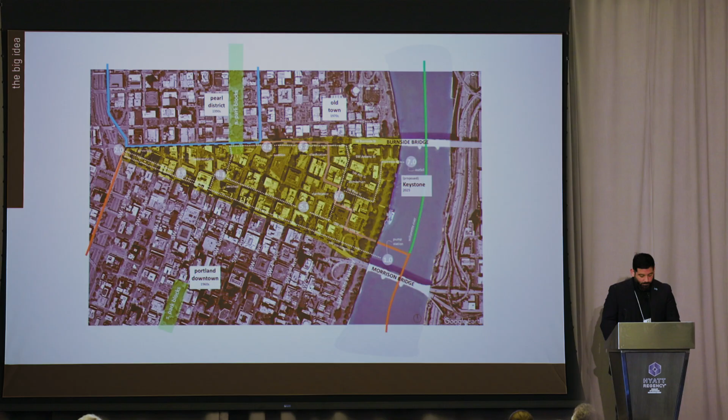For the process, I started by studying the landscape, looking at how our water systems are connected to other parts of the city, like transit networks, pedestrian paths, and gathering spaces. I paid special attention to where water and people already cross paths, moments that could be reimagined not just as infrastructure, but as experiences. I looked for places where water could be reused or collected, and where small changes could create new moments of refuge or beauty in the city.

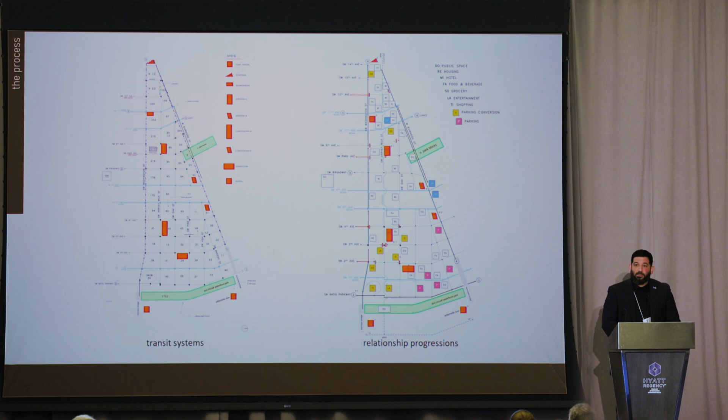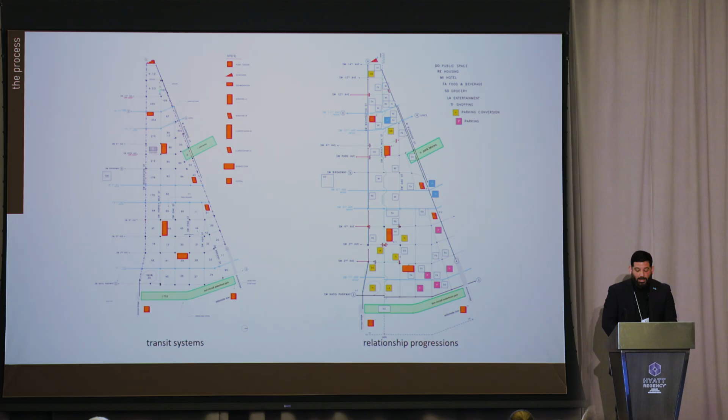This meant thinking about universal infrastructure that often runs beneath our feet, such as pipes, drains, and conduits, not as something fixed and hidden, but as a system of potential to surface and adapt. By bringing parts of the system up into the public realm, we can transform overlooked spaces into meaningful ones. Rather than treating infrastructure as background noise, we can use it as a framework for site-specific placemaking, designing spaces that reflect the character of neighborhoods while also addressing broader ecological needs. These become bridges between communities where shared resources like water become catalysts for connection, creativity, and care.

For the method, what I have on the screen is one of a series of diagrams, as well as 2 additional maps of the district at large. I used both numbers and observations. On one hand, I measured how much water landscapes actually need and how much we can realistically collect from rooftops or buildings - stormwater, not drinking water, not potable water, stormwater to treat our landscapes. On the other hand, I watched how people move through these spaces, how they gather, and where they pause, things that numbers alone can't tell us.

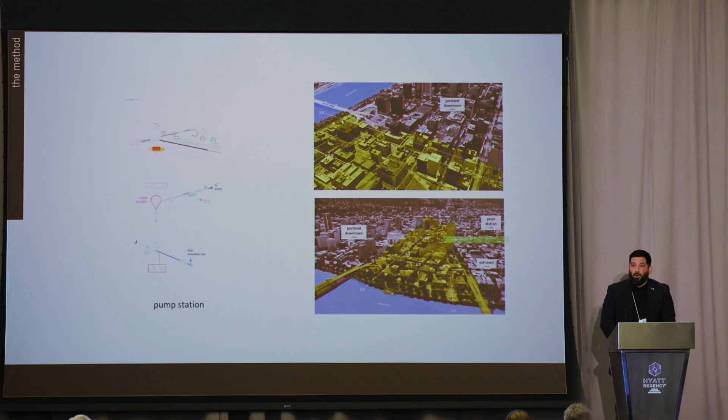From there, ideas combine technical needs with emotional and sensory experiences. The goal wasn't just functionality. It was also about creating connective urban tissue, spaces that don't just exist on their own, but actively link neighborhoods, foster social interaction, and support ecological systems. These designs help stitch the city together, making public space more than just a background. It becomes the framework for community and resilience.

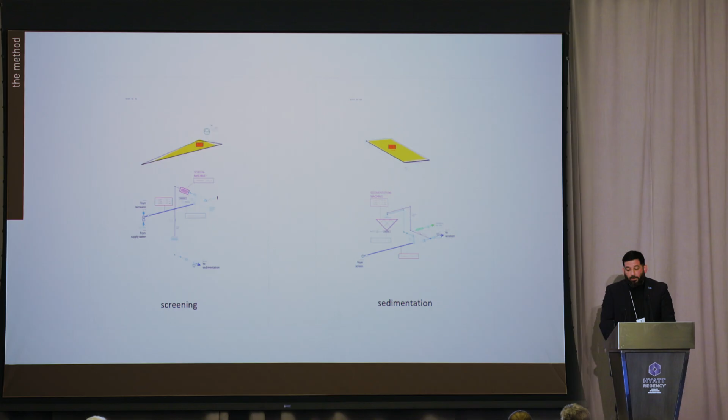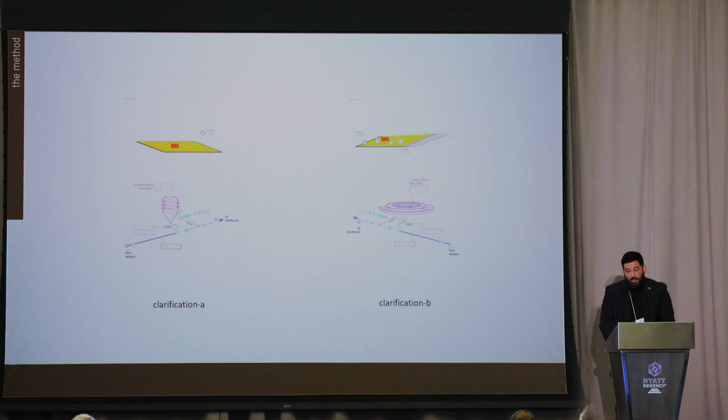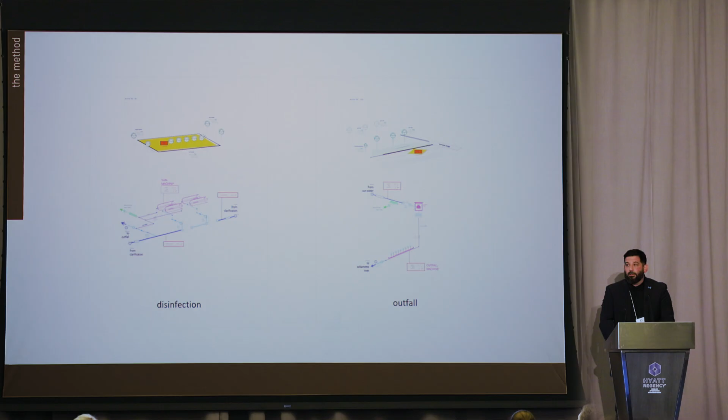For the design approach, one of my inspirations came from objects we interact with every day, things like coats, buttons, and straws. A coat, for instance, protects and adjusts depending on the weather. A button connects, secures, and opens up. A straw moves water from one place to another, similar to what's underneath our feet - pipes and conduits. These simple things inspired architectural ideas, structures that are flexible, useful, and also a little bit playful. They aren't just utilities; they invite curiosity and encourage people to engage with the water instead of ignoring it.

In the same way, water treatment can become part of everyday life, not hidden away, but integrated into the spaces we share. When people see how water moves, gets filtered, and nourishes the environment around them, it changes their relationship with it - it becomes personal. And this shift doesn't just benefit us. Trees, plants, and soil stop being background elements or aesthetic add-ons. They become collaborators in a living system, thriving not from leftover attention, but from a designed reciprocity.

Water infrastructure can nourish urban forests, create shade, reduce heat, and provide habitat, while those same systems slow, clean, and store water for reuse. It's not just about treating water. It's about reshaping the way we live with it together.

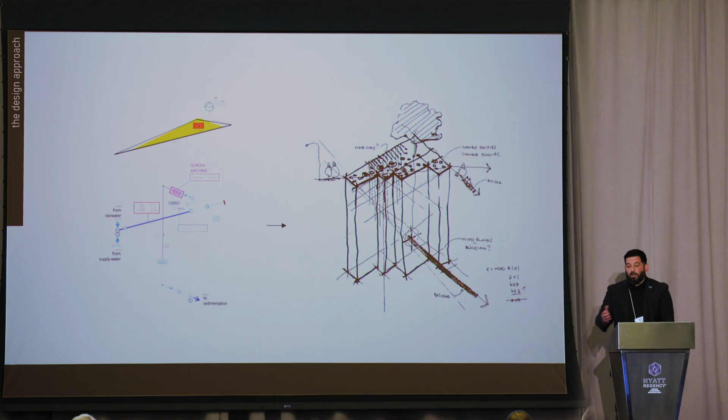What I have on the screen is a diagram of the screening process, one of the first systems any treatment system would encounter. I translated that into an architectural sense in terms of street, edges, boundaries, and landscape, which is what I attempted to show in this pictorial.

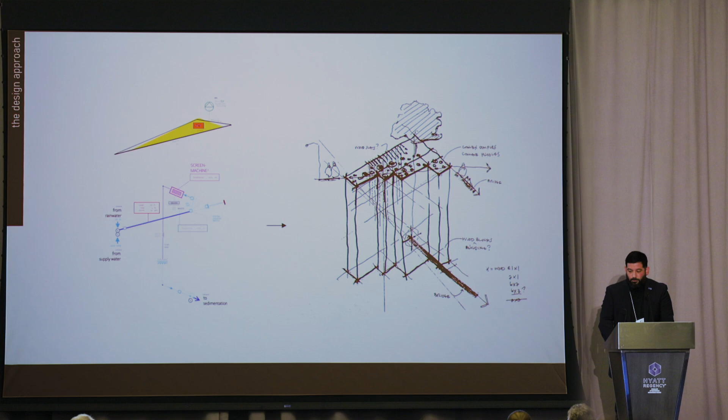Ultimately, this project is about connection between people and place, between systems and communities. When we bring water treatment closer to where we live, we make those systems visible and valuable. We start to understand the effort it takes to clean and manage water, and that understanding builds care. It also strengthens community—people become more aware, more involved, and more empowered to be stewards of their environment when it lives and breathes with them.

Managing water locally reinforces this connection. Instead of sending it away to be treated and forgotten, we reclaim it as part of our everyday landscape. It becomes a shared resource, something we see, touch, and respond to. Local water systems can double as public spaces, educational tools, and habitats, blurring the line between infrastructure and experience—they invite us to participate, not just consume.

The image on the screen is what I'm calling an over-under contactor sidewalk. It's typical in the municipal setting, where you have concrete cells of water containment, and hydraulic pressure moves it from one cell to the next, aerating, collecting, and filtering at each step.

This image is an example of wayfinding within the community, designed to encourage travel from one system to the next. It encourages retention and curiosity to explore the next system—if people don't know where it's at, this example helps guide them.

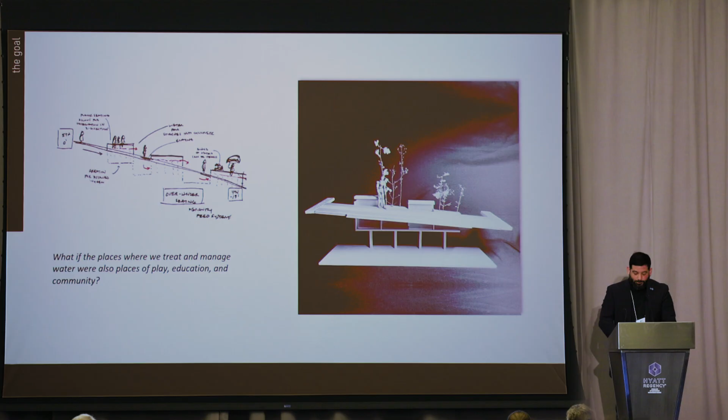Why it matters: we often think of water as a basic service, something that should just work in the background, but this project challenges that idea. It asks us to see water as a resource that can heal, teach, and inspire. By slowing down how we use water and designing systems that respond to the rhythms of our day, we can build spaces that adapt with us and honor water's presence rather than hide it away. We can't control water's behavior entirely, but we can design with it, alongside it, and around it.

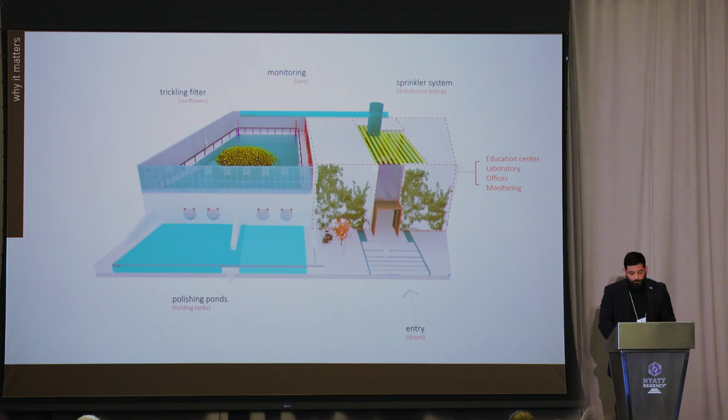In closing, Playful Decontamination is a call to rethink how we build our cities—not by hiding infrastructure, but by bringing it into the open and making it part of our shared experience. It challenges us to imagine public spaces where water treatment becomes visible, interactive, and even joyful, where systems that sustain life also spark curiosity, learning, and connection. This is an invitation to design differently, to create urban spaces that are adaptive, resilient, and deeply human—spaces where water is not just managed, but celebrated.

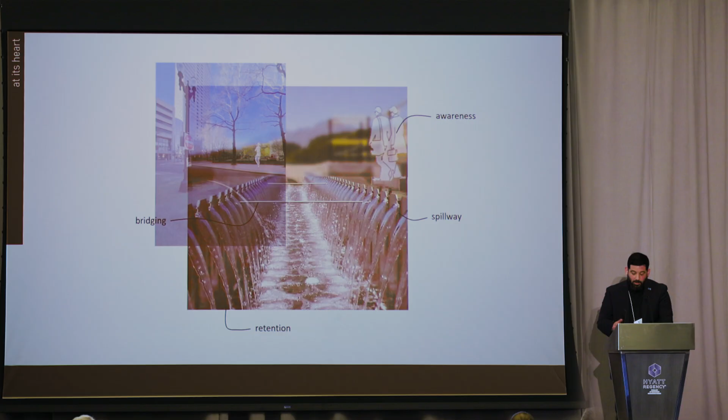So here's the question we all must ask: what if the places that clean our water also helped us connect with nature, with each other, and with the systems that support us? Let's build cities where infrastructure is culture, where care for the environment becomes part of everyday life and play. Thank you.

Thank you so much, Flip. That was really interesting work, showing us how playful engagement between communities and the water treatment process can be central and not hidden away on the outskirts, which typically don't remain on the border of cities that long. Very valuable work—this is awesome.

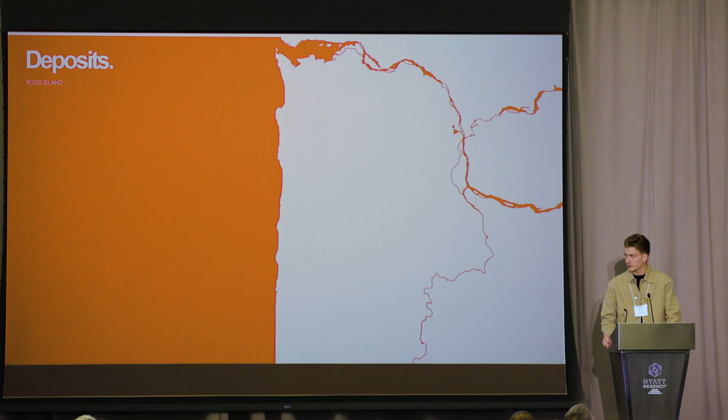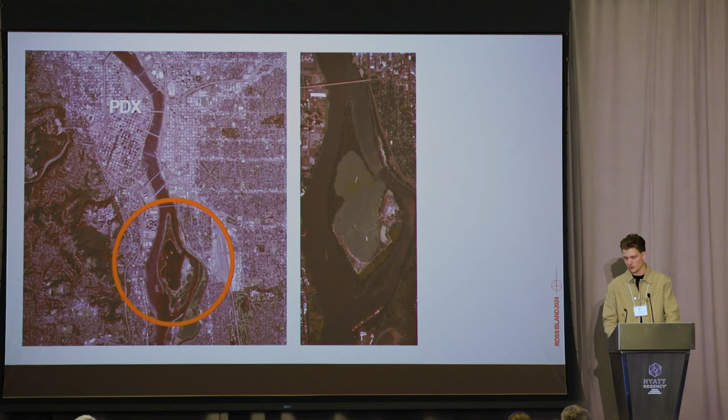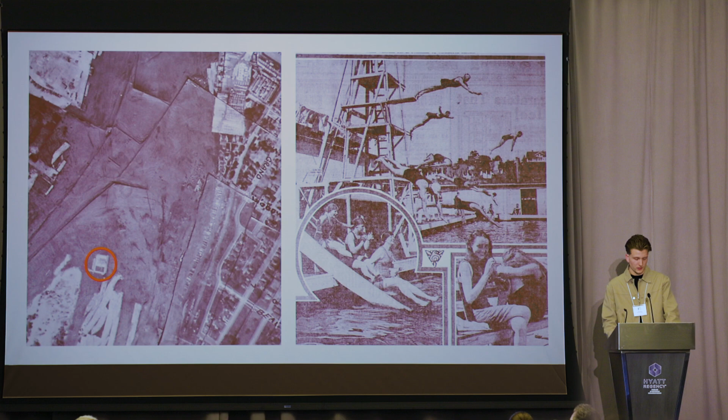Following Sherry Ross's 1850 dairy farms, Ross Island became home to the Windemuth in 1910, a large 2-story floating platform for dancing and swimming. The floating structure was just a 12-minute ferry ride headed south of Stark Street. In 1924, the Windemuth's water was declared impure due to watershed overflows carrying sewage waste into the Willamette.

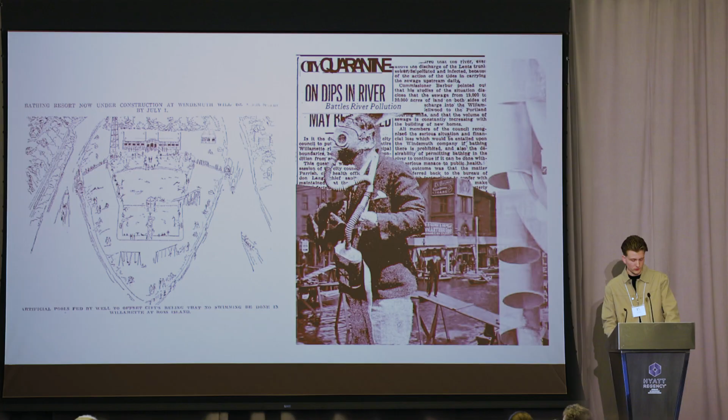This kept Portlanders out of the Willamette for the coming century, until 2011, when the Big Pipe project was completed. Speculative plans for Ross Island included a well-pumped swimming pool and a neoclassical Olmsted Brothers design.

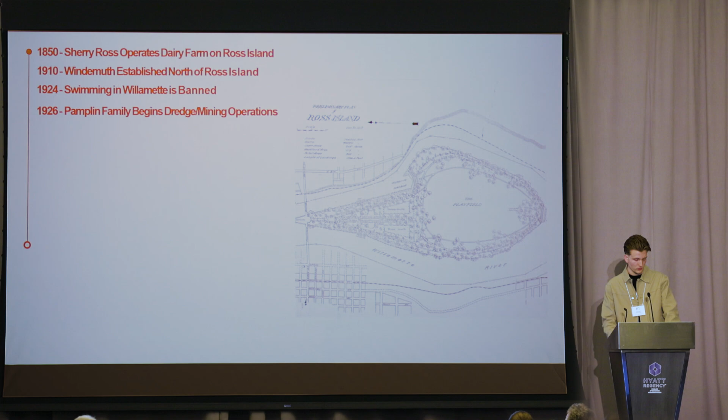Ultimately, the Pamplin family took full ownership of the island, and the U.S. Army Corps cut off water flow southwest of the island, which left the lagoon stagnant as it is today. The water was left stagnant to support the dredge operation that took enormous chunks out of Ross Island's landscape, leaving an unstable, torn riverbed behind. The image to the left is before, and the one to the right is after, in 1950.

This led to a long list of issues, most notably toxic cyanobacteria blooms that leach harmful bacteria into the lagoon, both up and downstream of the Willamette. For over a decade, this has kept Portlanders out of the water for weeks at a time, while we're facing rising global temperatures responsible for toxic bacteria outbreaks. This is just one of many issues along the Willamette, a constant presence that will continue to challenge urban settlement indefinitely.

Ross Island has many stakeholders, like Portland Parks and Rec, Ross Island Sand and Gravel Company, the DEQ, alongside organizers like the Human Access Project and Bird Alliance of Oregon, who have huge interest in the health of the island as it is today.

But as a community, we celebrate, we explore, we clean, exhibit, research, endure, protect, and utilize Ross Island as an asset each day, leaving no excuses for its mistreatment. We must acknowledge failure. We can't afford to keep wasting time and money on reclamation efforts that only deepen and worsen the scars in our landscapes.

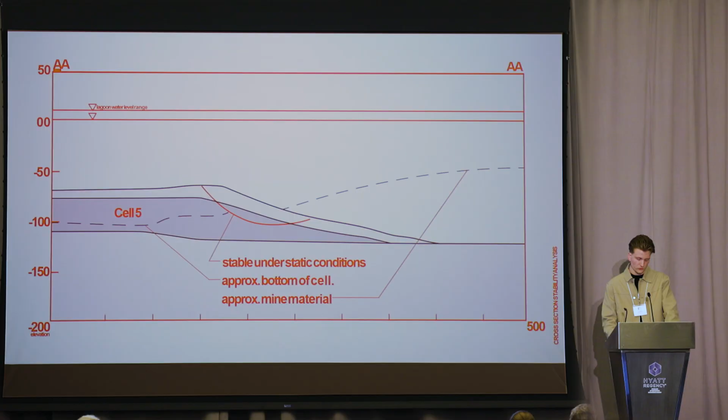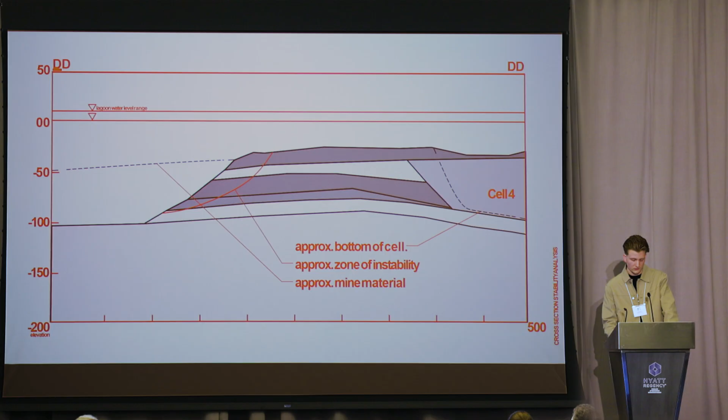The proposal is to open a 200 to 300 foot opening right at the southwest dike, establishing flow back through the lagoon. The toxic infill, laden with lead, petroleum, mercury, dioxins, and hydrocarbons, remains in the lagoon, where it is bioaccumulated into pockets of infill that threaten aquatic life, people, and pets if released by high seasonal water flows.

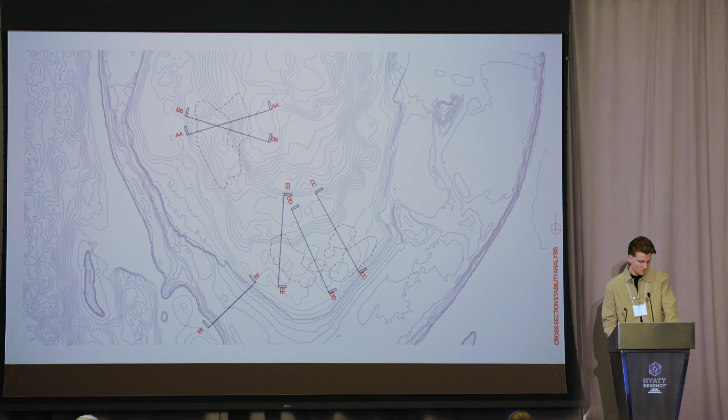The use of these dikes breaks the water flow, causing the water to eddy with turbidity. This allows trails of sediment to deposit and build natural landforms following the arrangement of dikes.

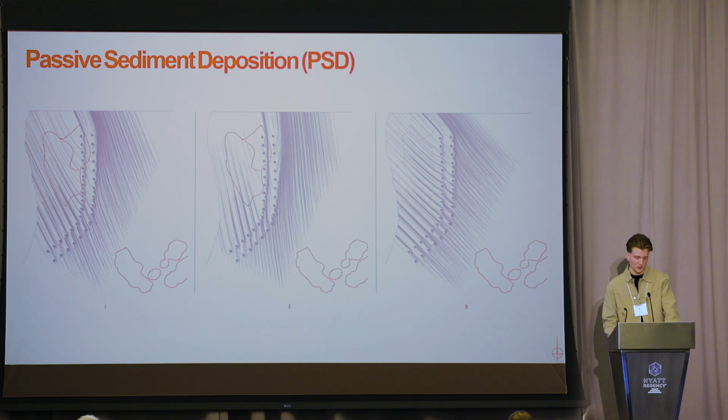My pile-driven dike arrangement at Ross Island would begin in this manner, protecting pockets 2 and 3 from rushing water currents and collapse, capturing the evident releases of toxic infill previously placed. This arrangement slows the water flow, causing it to eddy and deposit sediments in the riverbed along the lagoon, growing new landforms. To do that, I've elected to use steel helical piles, a low-impact, high-tech method for driving rigid supports to form the dike and establish an adaptable foundation and infrastructure for architecture.

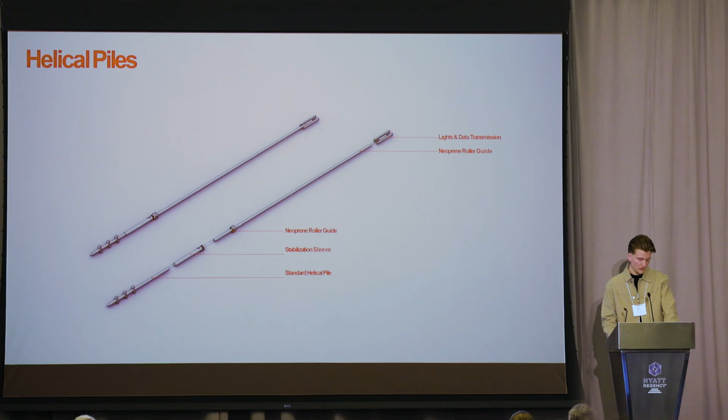The piles rise 50 feet above the water, acting as guides or tracks, if you will, for floating structures up and down, allowing the buildings to float up to 50 feet under extreme flooding conditions.

First, rock jetties are placed, protecting existing river embankments, in addition to the helical piles, which are driven into the riverbed before the water flow is reestablished. This lowers the temperature of the stagnant water, getting rid of the blooms, and eventually making way for the rest of the framework to be built out.

The network of pile-driven dikes cannot restore the deeply dredged lagoon landscape alone. First, infrastructure and a stationary dredge track will operate, conveying sediment along the linear track embedded within the central tube of the piles framework, essentially moving dirt from siphoned dredge material through a tube.

Buoyant platforms can be attached to the framework of the helical piles, creating piers which invite people to dock their boats, kayaks, and canoes and enjoy seasonal swimming, picnicking, fishing, or bird watching just offshore of the natural landscapes. A pavilion can sit atop this platform, providing shade, shelter, and lending a sense of enclosure and permanence to the framework of helical piles.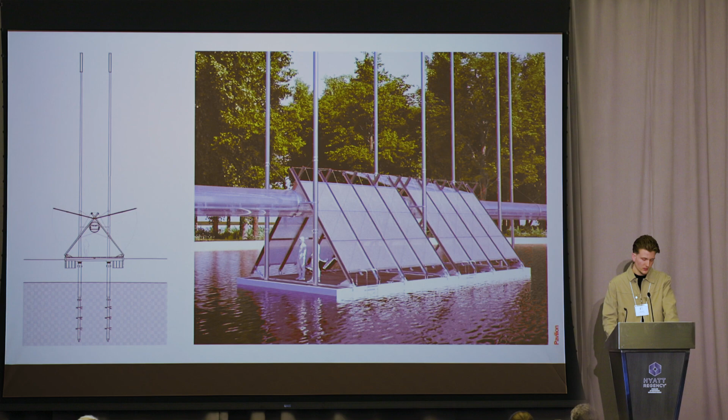The sediment is tracked through this continuously. The pavilion extends its operable limbs as a vital component of enclosure for field research stations operated by the DEQ, Portland Parks and Rec, and the Sand and Gravel Company, ensuring the island's restoration is actively monitored and responsibly managed.

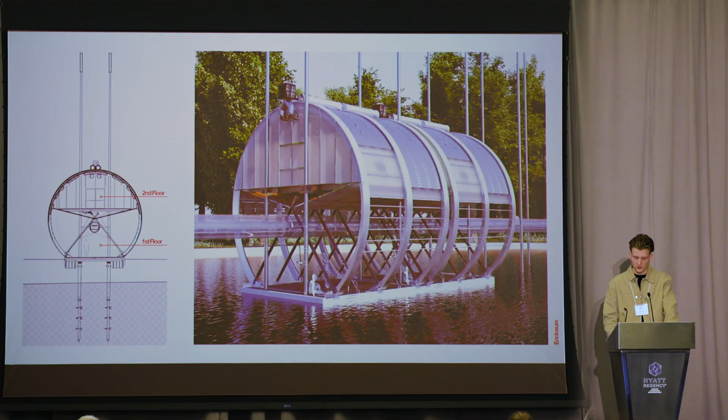The second floor accommodates a range of programs: temporary housing, laboratories, field stations, public kitchens, and auditorium spaces for gatherings which require shelter. Below, the structure supports circulation and storage for paddleboards, kayaks, canoes, field research equipment, but most critically, elements of ecological sanctuary.

This is an example of what that field station would look like on the second floor.

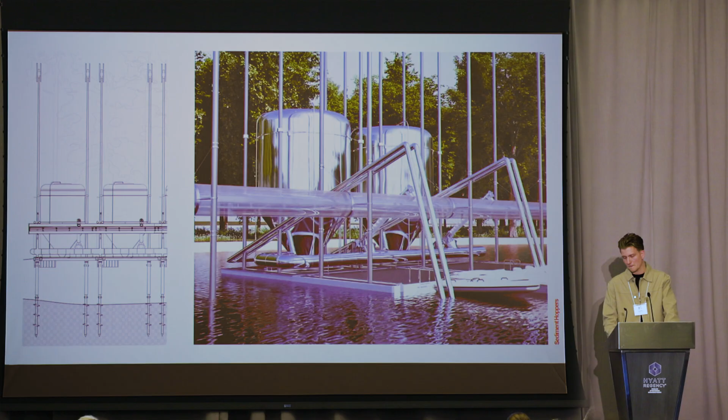The sediment track is all fed by a manual dredge operation that relies on siphoning sediment, which these very shiny hoppers separate into sand, silts, and clays. These raw materials are then manually fed and tracked through the central track and dispersed across riparian riverbed zones in need of their once extracted sediments. This method of repair relies on sediments naturally carried by seasonal river currents, promoting a more balanced and chemical-free composition of dirt.

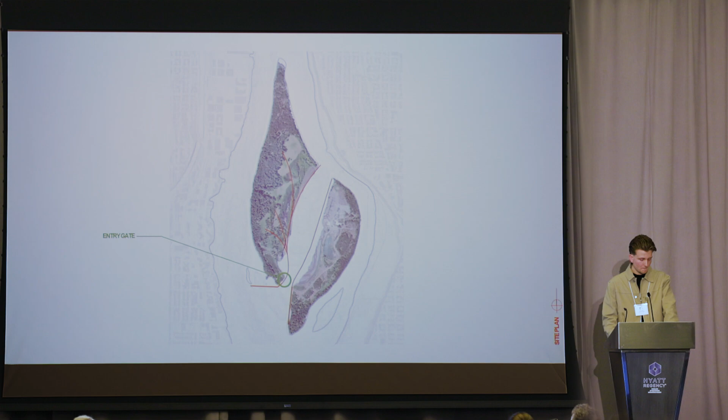Assembled together at an entry gate, these components form a system in which a few hoppers manually convey sediment while serving as a harbor for visitors, positioned near the island's entrance closest to the nearest public dock and boat launch.

This is a second-level floor plan showing the enclosure of the field stations to the right of the hoppers at the entry point of Ross Island.

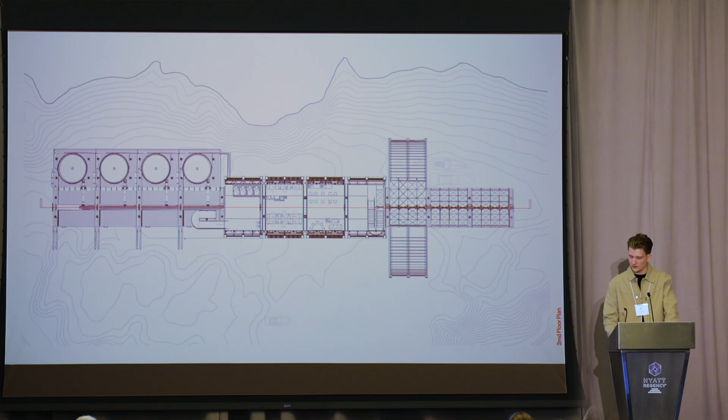This section shows the sediment track running through the core of the helical pile framework. The pavilions and enclosures to the right of the hoppers host areas for recreation, education, and exploration.

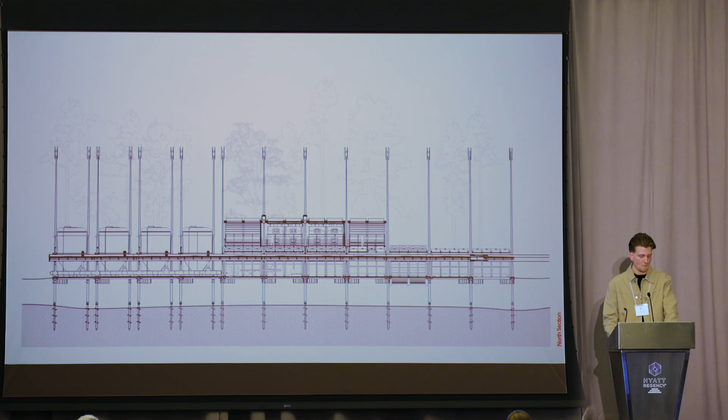This is an elevation view of the building, and it shows people with their kayaks down below, lounging on the lower levels.

Below the field stations, the pavilion and sediment track remain crucial elements of enclosure for lounging, circulating, and storing equipment. Wherein the pavilions themselves and platforms provide temporary relief and recreation.

At its core, this project seeks to heal 130 acres of torn riparian landscape, restoring habitat where the salmon can thrive, ospreys soar freely, and deer can find lasting sanctuary on the island. It's important that people visit to learn and to understand the ecological consequences of urban settlement, what it means for our health and generations that follow. By reclaiming what was damaged, we're not just restoring a landscape, we're rebuilding our relationship with it.

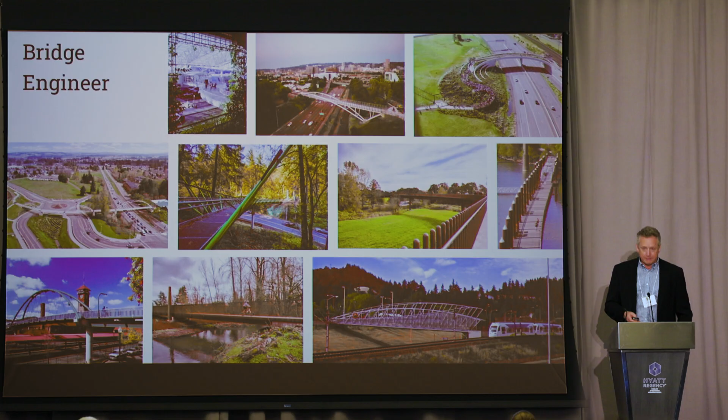So I'm a bridge engineer. I'm also a bridge owner and builder, and that's my construction crew, one of whom is here tonight. We live in rural Clackamas County and have a stream through our property, and that may actually have been part of why we bought the property, so I could build bridges there.

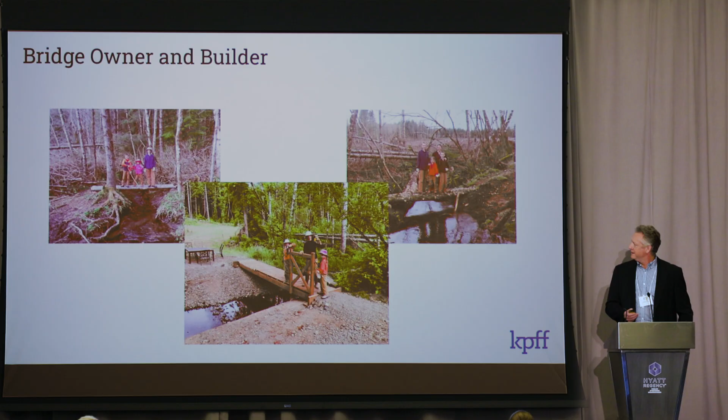And I'm a bridge tourist. I love to visit, especially the ancient structures, but just bridges around the world. There are some marvelous structures out there, and somehow our vacation always lands near a bridge.

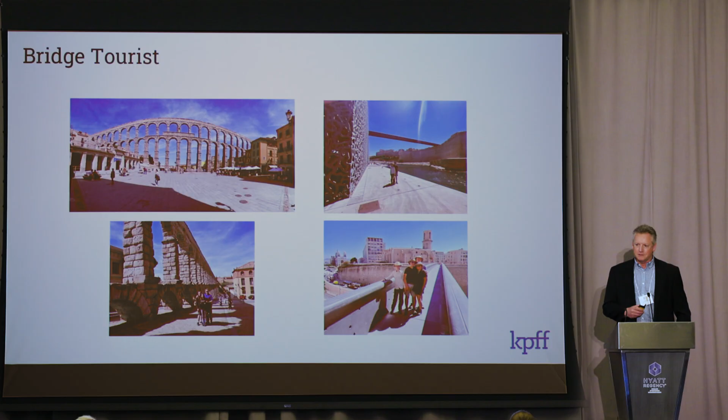Yeah, we've gone to see some great structures around the world. But I want to talk to you this evening about bridges, and I guess starting off, what really ignited my passion.

This is what's called the Firth of Forth Rail Bridge. It's quite a famous structure, dates from the 1800s and is kind of an iconic bridge in Scotland. Everybody knows about it, everybody kind of celebrates it, it lights up at night time. My grandfather on my mother's side actually spent his entire career as a signalman on this bridge, and my father, as a painting contractor, painted portions of this bridge as well. So I've got a special connection to it.

But what I wanted to highlight was what really got me interested in structural engineering and bridge engineering is this photograph of a display that was put together when the original bridge engineer was selling the idea of how this bridge would stand. Some context: this bridge was built after a real disaster in Scotland where the Firth of Tay Bridge collapsed in a windstorm, killing a lot of people with a train on it. So when this bridge was built, that was fresh in their memories, and they were really worried that would happen again. So the bridge engineer, I'm not remembering his name right now, wanted to demonstrate the robustness of this structure, and he had this photograph.

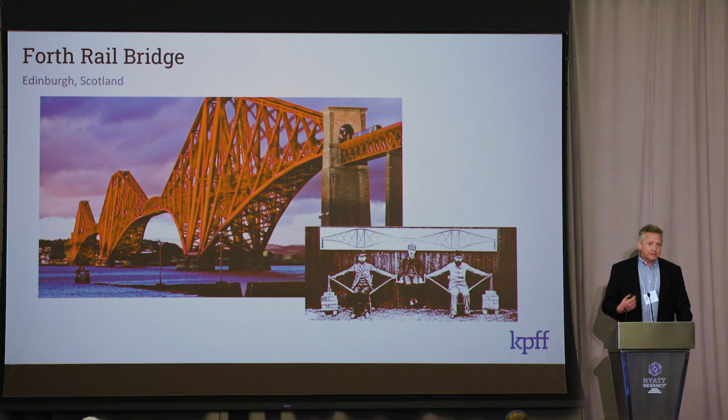For me, I looked at it and was like, oh, I'd always seen this bridge and thought, wow, that's a really great looking structure, but I hadn't actually thought, well, how does it stand up? And I just thought this was a great representation of how the forces pass through the chords on the trusses, how the counterweights support the center span, and it actually kind of got me interested in structural engineering.

Also in Scotland, we have lots of bridges built over the years. You might recognize on the right-hand side the Glenfinnan Bridge, the Harry Potter Bridge, if you've seen those movies. Maybe a little less obvious is the Upper Arch Bridge, the Stirling Bridge. If you've seen the movie Braveheart, where the first battle where he actually wins against the English, it was fought over this bridge. Of course, it was drama, there was some poetic license with the story in Braveheart, but this is where it happened.

And then just a bridge that I particularly like in Glasgow, where I grew up. This is the Albert Bridge, which was one of the first uses of wrought iron in Britain, a very graceful wrought iron arch.

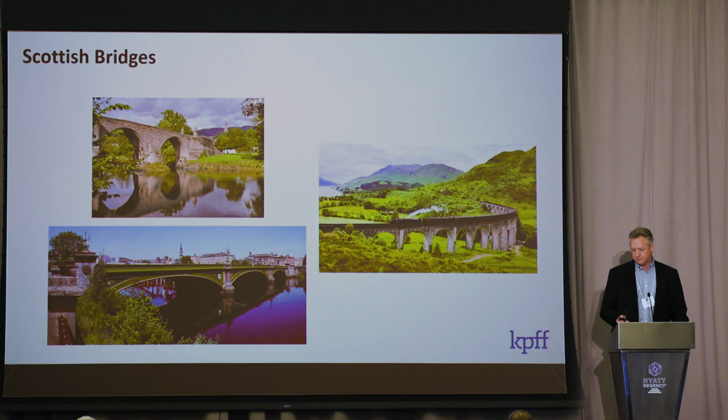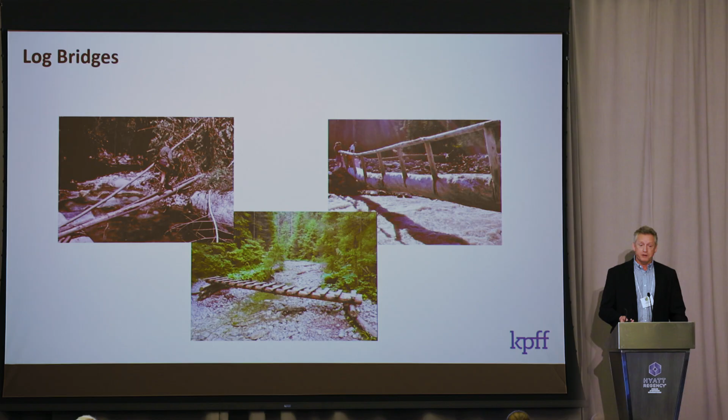So bridges, where did they begin? Well, they've been around as long as there's been something to cross, rivers, canyons, whatever, there's been bridges. And the most rudimentary type of bridge is a log bridge. We've probably walked across them on trails. You've seen them, they've been around for who knows how long.

That all changed in 1781 when the Severn Bridge, also known as the Iron Bridge, was built. There were some earlier iron bridges, but much smaller. The first major bridge that wasn't built with those traditional materials was the Severn Iron Bridge in Shropshire. It was still kind of an arch shape, but it took away the need for compression in stone, allowing it to be done in a much more delicate way. Again, the bridge architecture is really very elegant.

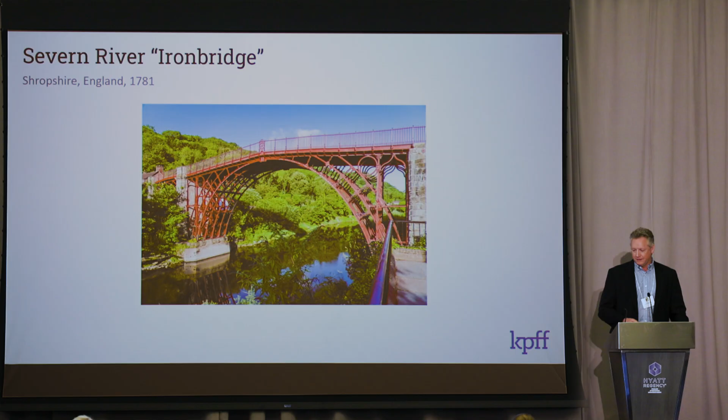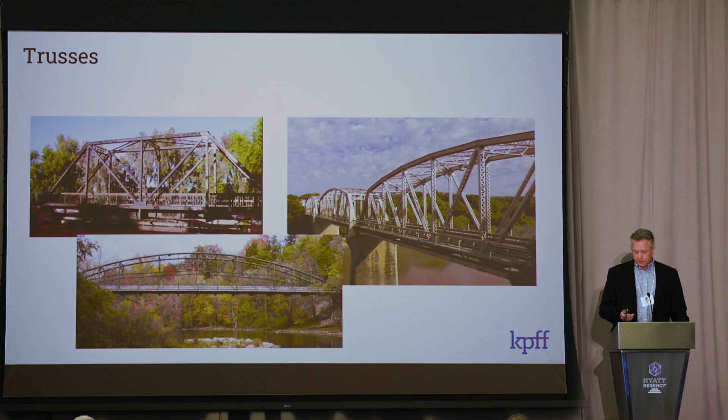So from that, of course, trusses became another very efficient way of resisting loads. Pratt and Howe patented trusses in the early 1800s, and rail bridges and road bridges were built around the country and around the world using that, with wrought iron and then later steel in the 1800s.

And then, of course, cables came around, and some really iconic bridges have developed over the years. So you've gone from this heavy stone arch, to steel arches, to lightweight cables, and it's impossible to describe all the different types of bridges that exist, but there's everything in between. There's combinations of trusses and cables, drawbridges, catenary bridges, floating bridges—a wide variety out there, but all developed from that 1781 Severn Bridge, where we stepped away from just using compression and timber to span over obstacles.

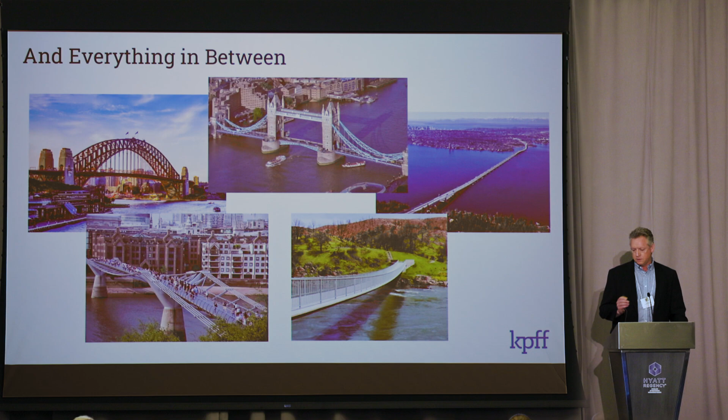And over time, from that Severn Bridge time, what's really developed in terms of the bridge industry and bridge engineering is this conflict between material costs versus labor costs. Back in the 1700s, 1800s, even early 1900s, labor was cheap, so material was expensive. The Iron Age, the Industrial Revolution—we figured out how to make cast iron, wrought iron, structural steel, but it was an expensive material to make when labor was cheap.

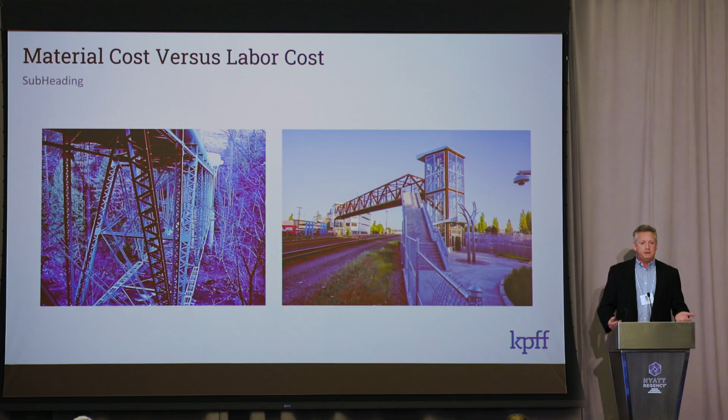After the Second World War, pre-stressed concrete became a very popular, efficient, and durable building material for bridges and structures as well. In particular, in the early 1950s, what's called the AASHTO-shaped girder was developed, and it was a very efficient way of combining pre-stressed steel and concrete into a prefabricated girder, which could then be adapted. Since the '50s, these shapes have developed—every state actually has their own variation of it, which is more and more efficient, really cuts down in terms of labor cost, and this prefabrication cuts down on field time. It's really the go-to material for shorter span bridges, less than 200 feet.

Unfortunately, the downside to this—and I'll criticize my own profession here—is that engineers have started to rely on these standard shapes. They have certain defined spans, we know what they can do, we know they can be put up quickly, and they last a long time. So looking back to the earlier bridge builders who would come to a problem, an obstacle, and figure out the most efficient, elegant way to cross it, we now turn directly to these charts and ask what type of girder we need to make this span.

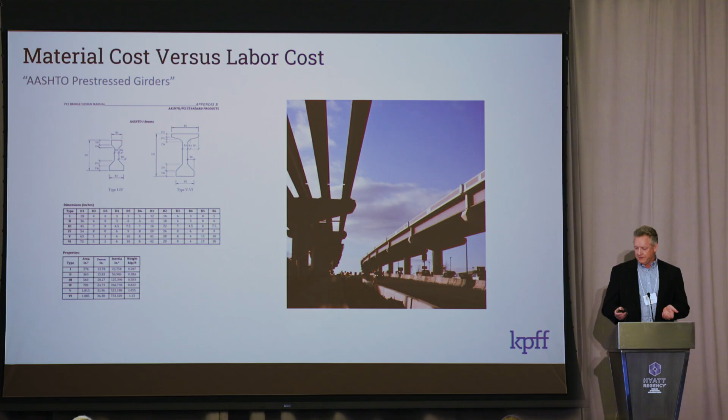There are examples of this all over the place. This is I-205 in Portland, the ring road around the east side, built in the 70s. This is Powell Boulevard, a portion of eastern Portland. The bridge built for I-205 in the 70s is actually quite a graceful structure, post-tensioned. You see the shape of the formwork that was made to be efficient but also quite graceful. It's probably one most people don't even notice, but it just blends in with the neighborhood.

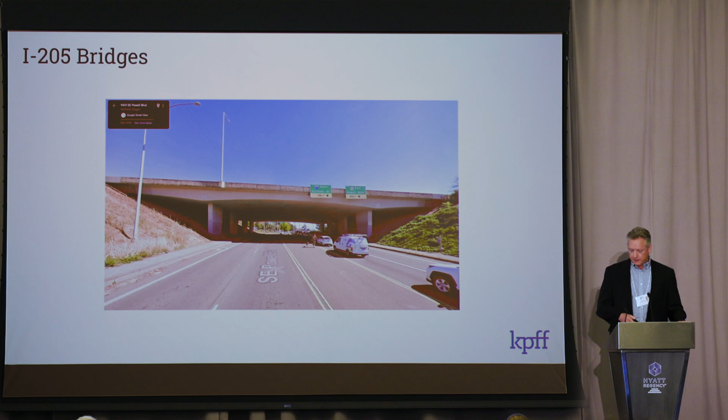This is Google Earth. If you turn the view 180 degrees, this is a bridge built 30 years later. What you see here are 3 different types of pre-stressed girders, developed from the AASHTO girders. In the same neighborhood, this was plonked down. The spans didn't quite work, so you'll see a large span that steps down to a smaller pre-stress. I'm not trying to criticize the engineers so much—this is a TriMet bridge. The agency has just gotten into this rut of trying to figure out what cookie cutter works in various situations. When it doesn't quite work, we find another piece of cookie cutter that makes up the rest of it. So, an analogy.

Again, I'm not trying to criticize ODOT here—this just kind of reflects our industry and my own profession. This is one of the first parts of every ODOT contract, Oregon Department of Transportation. There's a statement in the contract for design contracts I just signed recently that said: avoid expenditures for aesthetic effect which are disproportionate to the project as a whole. I get that and understand it, but unfortunately what's happened is over the years we've interpreted this as saying let's not spend any money on how a bridge looks when we don't have to. If we're doing a pedestrian bridge or an iconic structure, let's make it look great, but otherwise let's just spend as little money as possible to build that bridge.

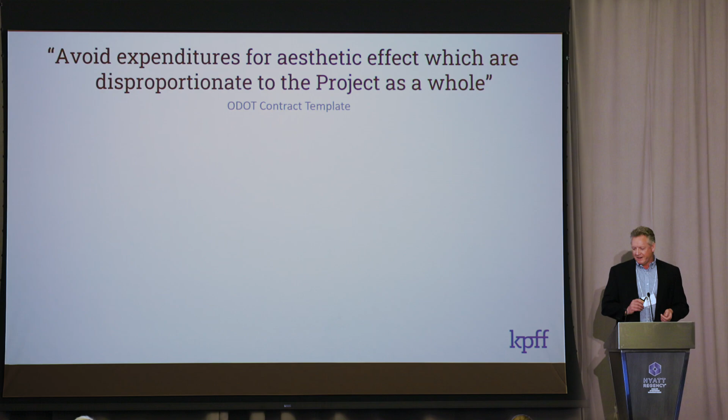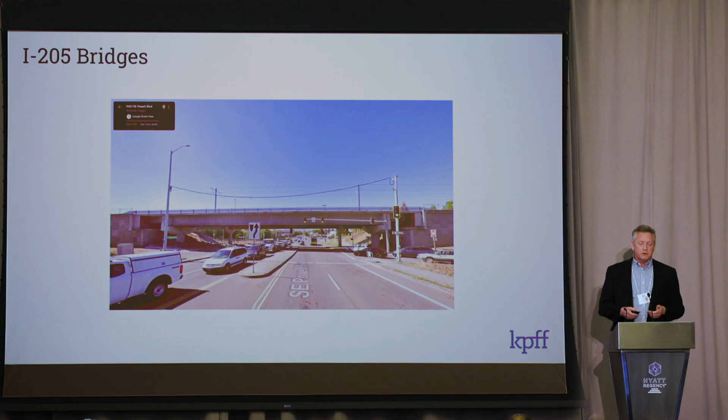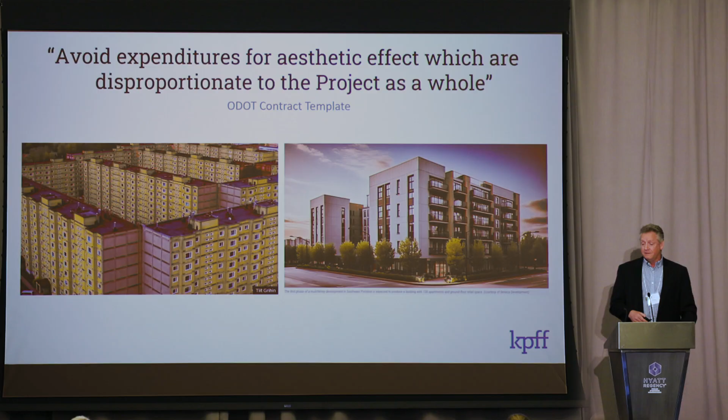But yet we don't look at bridges the same way. Unless we're trying to make a special statement, we just see what fits, what's going to work, what's the minimal cost. The point I'm making here is that we should look at all bridges the same way we do the buildings that fit in our neighborhoods and our society. They should fit well, they should blend, they should have some structural elegance to them, some architectural design. If engineers are not comfortable with that, they should hire architects. I've hired architects a lot to work on our bridges for that reason—I know what I'm good at, but I also know what I'm not good at.

So with that, I'll close on 2 Scottish structures. One, the Forth Rail Bridge, where my father and grandfather worked, and then a much more recent structure close by—rather whimsical, but it's become this iconic structure in the area of Falkirk, which was actually where William Wallace fought his second, not-so-good battle against the English. But this is a structure that people actually come to see, and the community rallies around it. So I've challenged my profession to focus more on providing good architecture in bridge design.

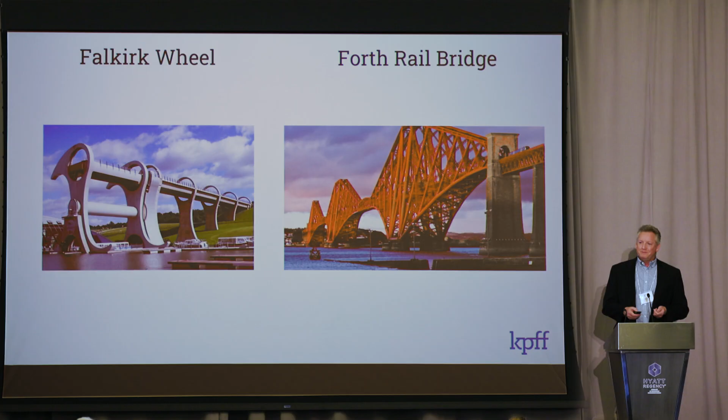That was awesome. Thank you for awakening my aesthetic look at bridges. I will definitely look at them differently, and we're always available to help and make bridges nicer. Thank you for that.

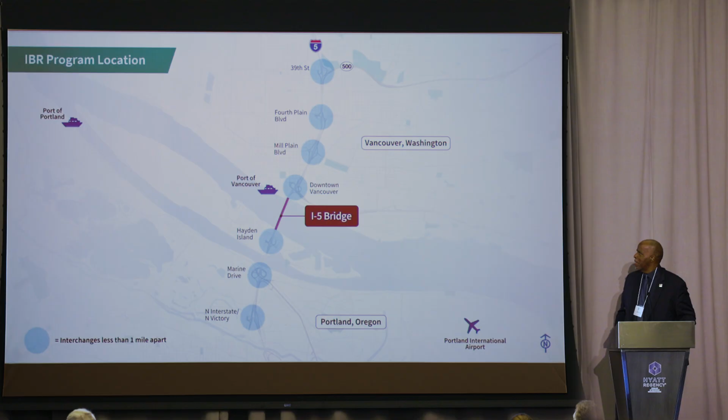Let me get started and give you some background. We call this the Interstate Bridge Replacement Program, IBR, and it's more than that—this is actually a 5-mile corridor. You'll see 7 interchanges that basically act as one large interchange because they're so closely spaced. We have an interchange on Hayden Island, where the only way on or off is the freeway. So we are trying to solve a number of problems in this corridor.

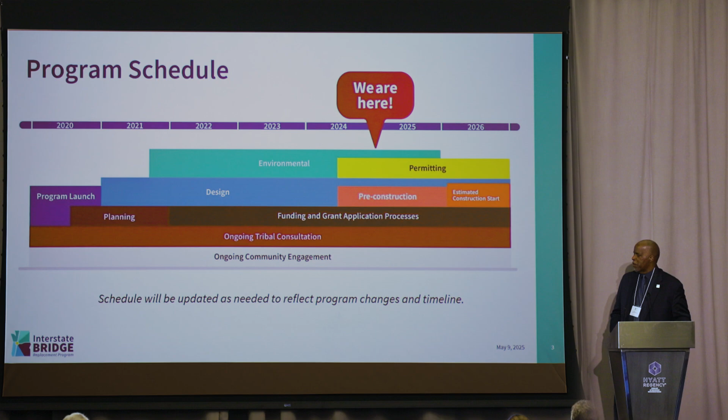So we have to maintain traffic in this corridor because there are basically only two ways to cross the Columbia River in the Portland, Vancouver metropolitan area, I-5 and I-205. Currently, I-205 carries 170,000 vehicles per day, and we carry over 140,000. So if we shut our bridge down, there's no way that I-205 can handle over 300,000 trips per day.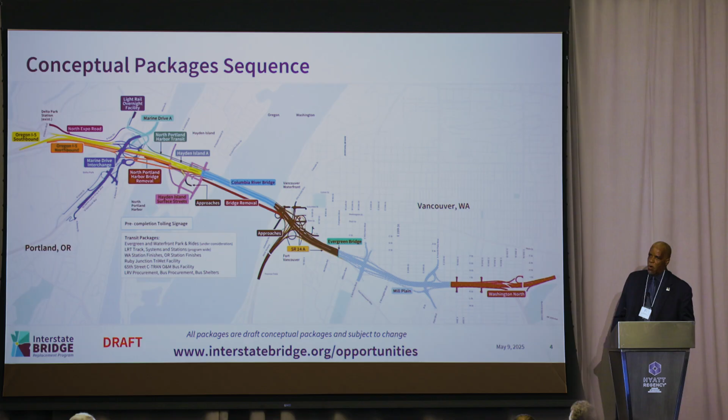But this is the project, and you can see we have some very complex interchanges, Marine Drive to the far left, the SR-14 on the Washington side. These are mega projects within themselves, but this will be a part of the overall program that we are seeking to get constructed.

So how do you pay for a program like this? I appreciated the call for not just looking at what the dollars are when you are building something that's going to last for 100+ years into the future. But we also have to be aware of the funding we have and how much things cost. Right now, we have an estimate done three years ago that put the cost of reconstructing this corridor between $5 and $7.5 billion.

And we are in the process of doing a new estimate that we know is going to be much higher. We know that inflation in the construction industry has been outstripping any of the projections that economists who study the construction economy could ever project. So we know that this price is going to go higher.

But right now, this is a good news slide. We have approximately $7 billion committed for this program. What has changed is the toll funding. The state of Washington, who will be doing the tolling on this project, has said we recognize that inflation is eating these projects alive, so we're going to increase that 1.2 billion in potential toll funding up to 2.5 billion. We got $1 billion each from each state, and we have right now 3.1 billion from our federal government. We're also looking at another $1 billion to help us build light rail across the river.

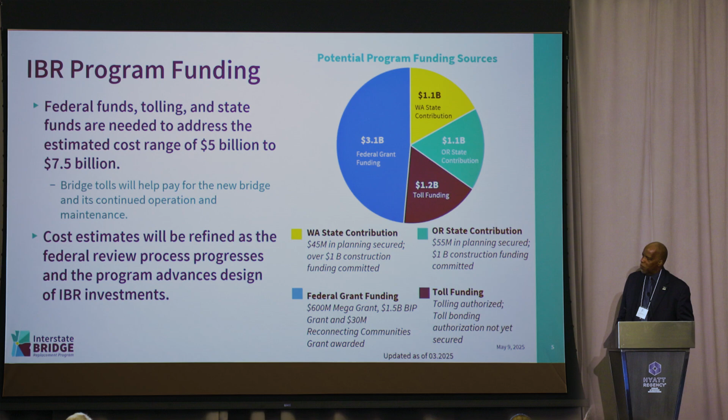So this is— the previous project did not get this type of funding, so we have secured funding that will get this project underway and will get the big bridge built along with the connecting interchanges.

So this project will have numerous benefits, but one of the things that we think is important is that you will see construction activities for probably 10 to 15 years. We're projecting that there will be 5,500 direct construction jobs for every $1 billion we spend, and almost 11,000 indirect jobs. So this will be a boon to the economy here in Portland and Vancouver, in this entire region.

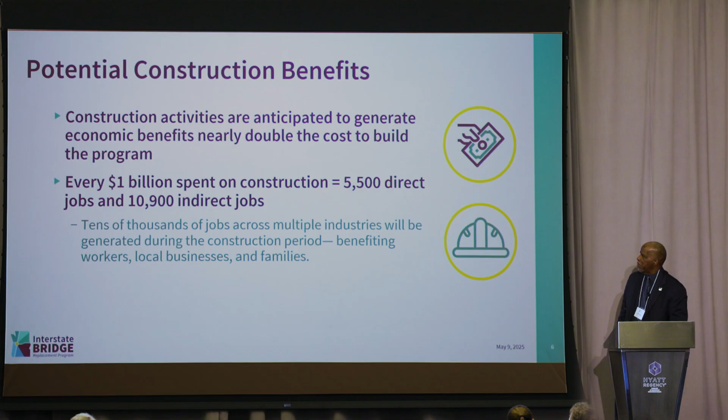But once again, the highlight of what we are doing is involving the community. So I tell folks I have 10 bosses: 2 DOTs, 2 cities, 2 metropolitan planning agencies, 2 transit agencies, and 2 ports. They all make up the executive steering group helping to get this program built.

One of the key things they told me when I first came here was that the community's voice has to be heard in this. So we created a community advisory group as well as an equity advisory group to help reflect what the community desired to see in a program of this size that will have this long-lasting impact in this area. We also learned lessons from the last go-round, so we created a bi-state legislative committee to keep the politicians on each side of the river knowledgeable about where things were going and to take their input to incorporate into the program.

Workforce is going to be one of the challenges. As members of this industry, you know that we are seeing a gray tsunami of retirements of folks who helped build a lot of the interstate and associated infrastructure. So we are doing outreach into the community to create pipelines for pre-apprenticeship and apprenticeship programs, to bring the community in and give folks who never had an opportunity to work on programs like this a chance to be a part of what we are trying to do.

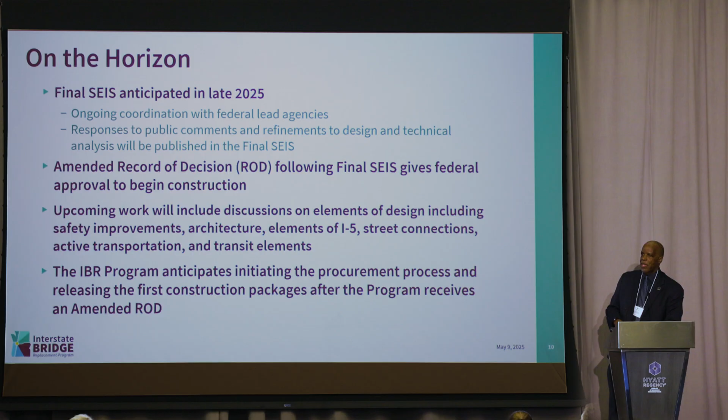And most of our projections show it actually going out to 15 years worth of construction. And because we're maintaining traffic and building light rail, all of those things take time to get the funding pieces in place and then the physical construction itself.

You can go to our website once again. It's a fabulous website, great information. It has records of all of our meetings that we have ever held. You'll see the good, the bad, and the ugly. Folks will tell us what they think. They've called me names that I won't even repeat, but we are going to get this project done.

And one of the key reasons, as many of you know, off the coast of Oregon sits what is called the Cascadia subduction zone, an earthquake zone, part of the Ring of Fire around the Pacific Ocean. That fault moves approximately every 300 to 350 years. We are coming on 350 years since that fault has moved significantly. So getting this bridge into a survivable state in the case of a massive earthquake is going to be vastly important for the economic viability of this area when that earthquake hits.

So you can follow us. We have a very robust social media presence. We're doing great things. We have office hours. If you want to visit us, we have an office that's not even a mile away from the bridge itself. And you can come and arrange office hours to sit and talk to us.